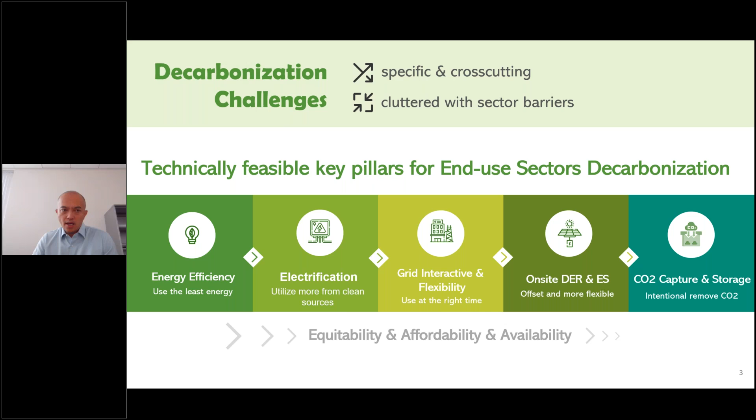For the last decade, our center focused on the energy efficiency pillar, addressing localized energy efficiency problems and working with plug loads. As we start the second decade of CalPlug, we're shifting our focus along with the emerging trends.

In terms of energy efficiency, there will be more and more smart and controllable plug loads emerging in homes and buildings. This will enable deeper energy saving and more sophisticated controls.

In terms of electrification, it is by far the most dynamic element of the energy transition. The share of electricity in global end-use energy will double from 19% to 38% within the next 30 years. There will be more and more new plug and process loads inside homes and buildings.

From the supply side, as the energy transition goes on, renewables are competing with all other power sources on the grid and also on the on-site generation side. Therefore, more dynamic grid resources and more locally dispatchable renewable resources will be available, and this has to be taken into consideration as well. So the trends of energy demand and supply are changing rapidly.

Therefore, decarbonization needs to be addressed not as an isolated system, but through holistic approaches.

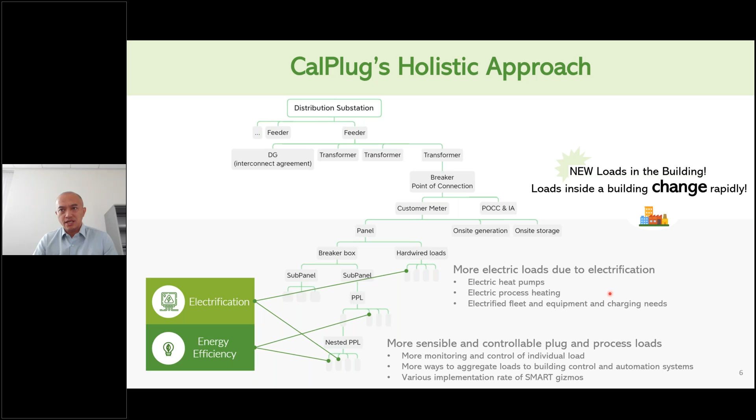On another layer, building control strategies that enable great flexibility in the interaction, enabled by directional on-site renewables, are taking effect at these points. But it needs to aggregate and coordinate as much of the loads inside the building as possible to be effective, starting at this connection point and down to the nested plug loads and process loads at the bottom.

So energy efficiency and electrification will introduce more smart, or not so smart, plug loads and process loads to the building, and existing building control strategies need to be adapted. They need to be able to better accommodate the rapid change of plug and process loads, to better utilize on-site PV generation and other energy storage, and to better accommodate grid interaction.

In summary, CalPlug's holistic approach starts from the very end use, the nested and rapidly changing plug and process loads, through the integration of sensing, measuring, optimization, analytics, and real-time control to provide data and insights. This enables optimal orchestration for grid-interactive efficient buildings, and also helps develop economically and technically feasible decarbonization pathways for small and medium-sized commercial buildings and small and medium-sized manufacturers and their buildings.

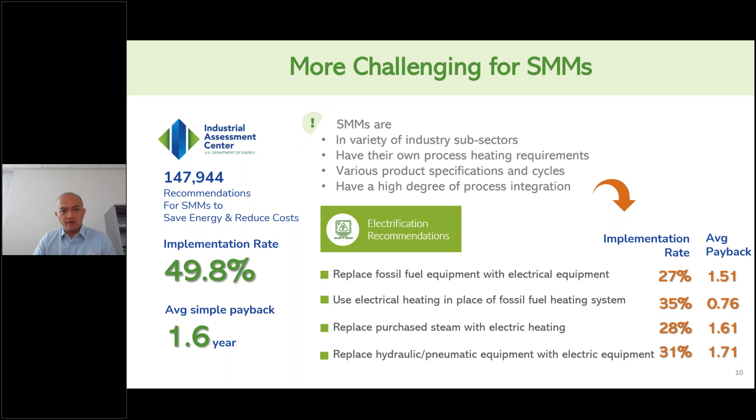From another perspective, our holistic approach is data-driven. It will use data and insights from plug and process flow to generate new business intelligence, new energy intelligence, and new carbon intelligence synergistically for small and medium manufacturers. The ultimate goal is to develop economically and technically feasible decarbonization solutions that improve energy and operational efficiencies for small and medium manufacturers and commercial buildings.

At the end, I want to emphasize that a holistic approach requires collaborative efforts. Plug and process flow, smart control, building automation, AI and their applications, distributed generation, energy storage, grid operation—these are all indispensable as we move forward.

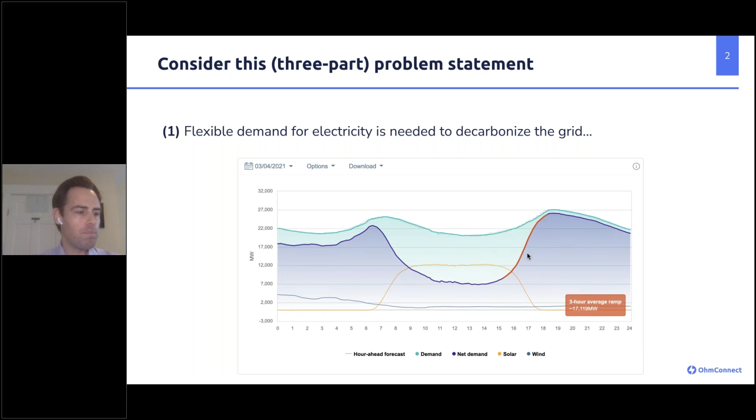And on this particular date in the spring of this year, we saw a 3-hour ramp of about 17,000 megawatts. So if we are going to continue to add renewables to our grid, we are going to have to find a way to move some of this load out of this particular time of day and into periods of abundant renewables. And we're going to have to do that through some combination of policy and technology.

The second part of the problem statement, though, is in order to get flexible demand at scale, we're going to have to do this through automation, through some significant automated control of household electric loads.

As you can probably imagine, it is completely unreasonable to think that 17,000 megawatts worth of loads are going to sit around on standby and wait to take manual behavioral only actions, turning on and off switches, on and off appliances or processes in order to help address that net load ramp. We're going to have to do this through automated controls in significant part.

The but here, part 3, though, is that many households face barriers to adopting energy automation technologies. And we're going to get into what these barriers are in a little bit more detail in just a moment.

But the solution that I want to propose to this group today is that simple Wi-Fi smart plugs are going to be able to help us overcome a number of these barriers and thereby catalyze the flexible demand electricity we're going to need to decarbonize our grid.

And in case you've never seen one of these little gizmos before, it's a simple inline plug. You can insert it into any outlet in your home. And in effect, whatever appliance you plug into this device becomes smart in the sense that you can control it, turn it on and off remotely over the internet using a smartphone, using your computer, or by setting a schedule.

And what we have found in our experience as a demand response provider in California is these little things go a long ways towards addressing the problem statement we just spelled out.

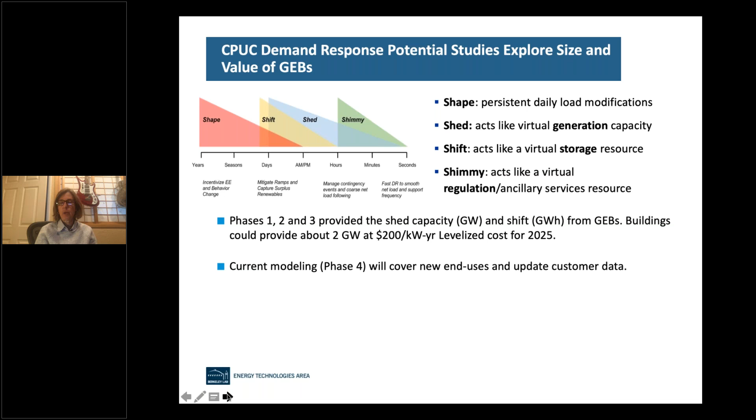So that's the main thing I wanted you to know, is we're doing more on modeling those plug loads, and it would be really great to work with this team of people to improve our modeling of those kinds of loads. So the basic idea is, how large is the shift and shed resource, and where is it?

When we do these models, we had 300,000 electric load shapes from California customers and 11 million demographic files. In phase 4, we now have 400,000 load shapes, and we're creating a variety of clusters that represent common loads for residential, small commercial, large commercial, and industrial. So we're trying to really understand the size and the location of the resource.

So finally, we know we need more of this shift, which John showed you the duck curve. I showed you something like that. So we want to drive down the cost to participate in providing flexible loads.

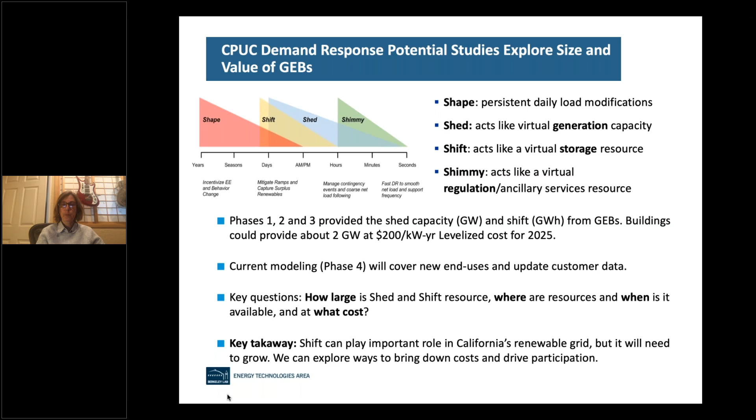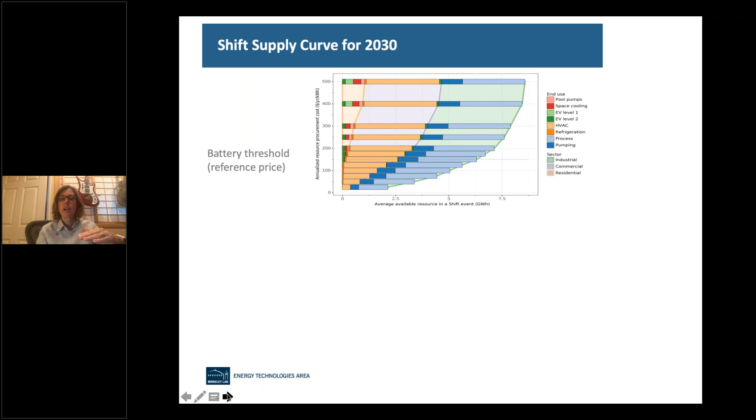This is what a supply curve looks like. I'm not going to go into the details, but we basically look at how many gigawatt hours are available for a particular price. And I have in there a dashed line, which is a battery reference. So anything cheaper than a battery is a real good investment in shift.

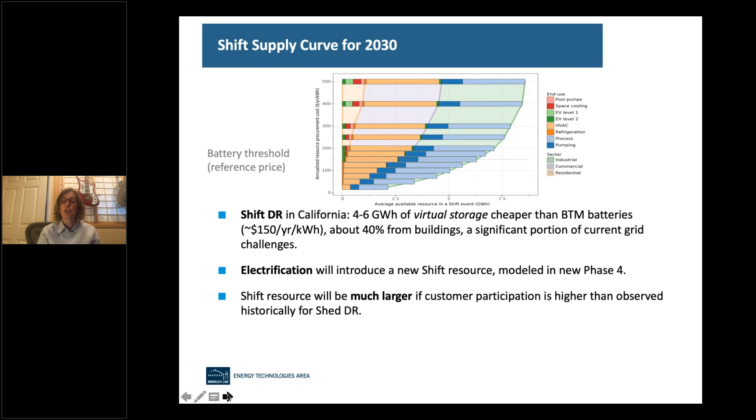So we have this 4 to 6 gigawatt hours of virtual storage. Electrification is super important because we're going to have, if we don't make heat pump water heaters and space heaters flexible, the duck curve gets worse. So we really need to look at how we make more flexible load out of it as we electrify, and the shift resource gets larger if we could have better participation, like the technologies that OhmConnect was providing.

So we really want to have about, right now we have about 1% of the load can get us about reducing 50% of that overgeneration from the duck curve that we have today. So these reports are available at drc.lbl.gov, the Demand Response Research Center, and I will of course provide these slides to you and happy to follow up.

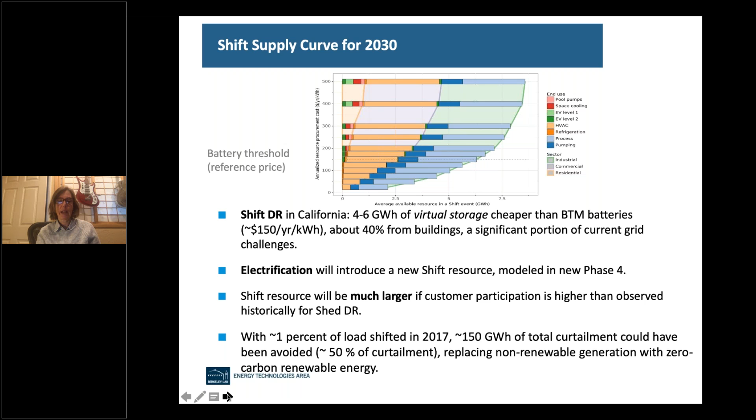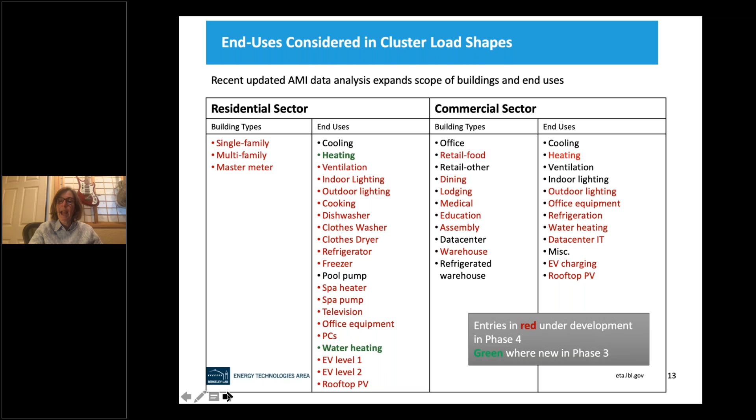So this is my final slide. Let me go back to this last one for a minute because I didn't explain the green. In phase 1 and 2, we modeled everything that was in black. Then in phase 3, we added the green. We added space heat and water heat in residential, but we didn't have electric space heat and water heat in commercial, which we're adding now. So in general, we're developing more capability to understand the end uses available for load flexibility by building type. In the commercial sector, we now have dining, lodging, medical, and education. We're adding more robustness to the platform and creating a capability that we hope to use to help the state develop policies and help utility programs understand how to incentivize load flexibility.

So I'm going to summarize for a few minutes and talk a little about, at a big picture, what we're trying to do in the CalFlex Hub. The number one thing we're trying to do is promote load flexibility based on price response, which allows for decarbonization of the buildings grid. We want to use end uses that can respond to price signals. Most of the utilities are hoping that we use OpenADR technology, which is celebrating its 20-year anniversary next year and is available for automating demand response today.

We are considering the price data models and how to broadcast prices. Most of OpenADR today is a two-way technology, so we're exploring broadcasting prices using the internet and a standard format, as well as FM signals. So then we need to understand what is needed to retrofit a device to enable it to listen to a price response. And where's the intelligence? Is it at the water heater? Is it at the cloud? Is it at the DERMS provider? The cloud may be a manufacturer or a DERMS provider. So we have a variety of these technologies, and we want to identify how to deepen the response.

If we had thermal energy storage in commercial buildings, in residential buildings, you could cool the building and store heating or cooling, and then use less electricity during the dirty hours or the expensive hours. Normally, the expensive hours are the dirtiest hours. So we could take that low price electricity and send an automated signal to devices, understanding how to use both a price signal and a carbon signal.

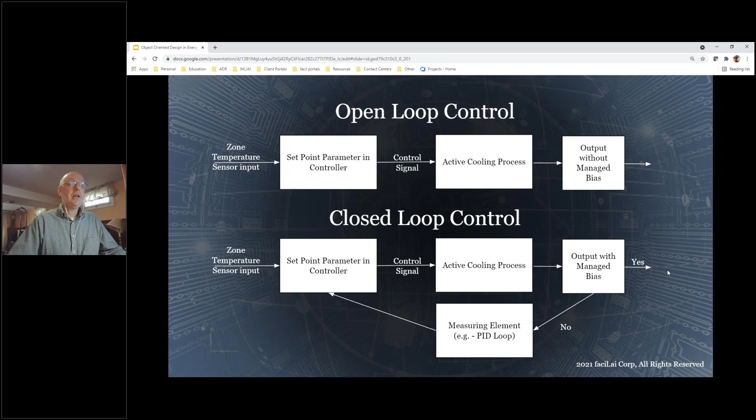In mission-critical and life-preserving applications, PID loops are the vehicle of choice to drive error towards zero. So you find PID loops in controllers in nuclear facilities, for instance.

But they are highly specialized. They require a very exacting degree of sensor calibration and take exceptional effort to tune. As a result, PID loops will not be in a negative feedback in those rare closed loop control systems that may be found in retail facilities. I've never found one in a retail facility, so I would suggest there isn't any.

It's highly rare. But please note there are three elements to error correction: there's the proportional, or the amplitude of the error; there's the integral, how it performs over time; and then there's the derivative, the slope of the curve. Those three elements are vital to any error correction.

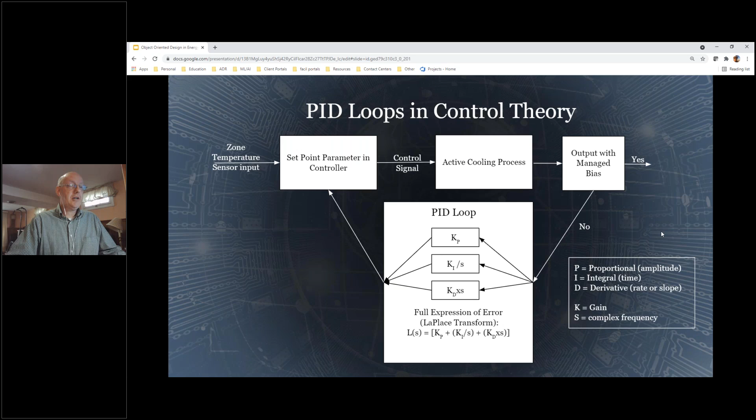This illustration shows how a PID loop would recurse with the negative feedback of a closed loop system in a highly engineered application to achieve the full expression of error. I hope you would note that the gains on each of the proportional, integral, and derivative elements are returned to the loop as a control input. But you can imagine handling each of those three elements would take a rather extraordinary effort.

Just want to point out that you may recognize this from high school math, that the limit of a function as it approaches zero is zero. That's what a PID loop is trying to achieve.

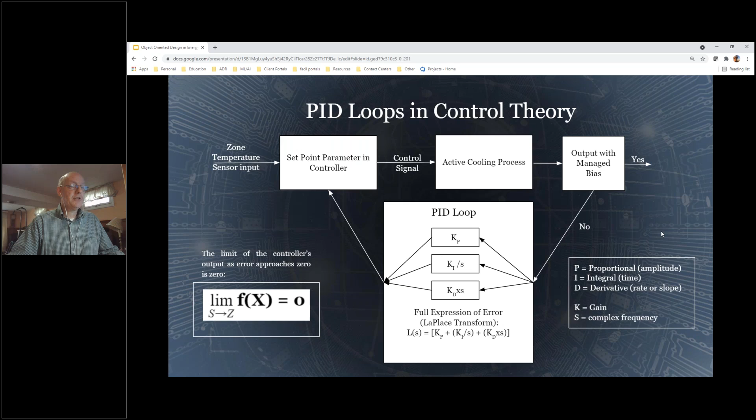And I did indicate in the slide with the contents the subjects we'd be touching upon. There are cases where there are closed loop systems out there, but in a way, to penetrate a market, they only attack the amplitude of the error, which is instantaneous. It doesn't rate its slope. It doesn't rate its performance over time.

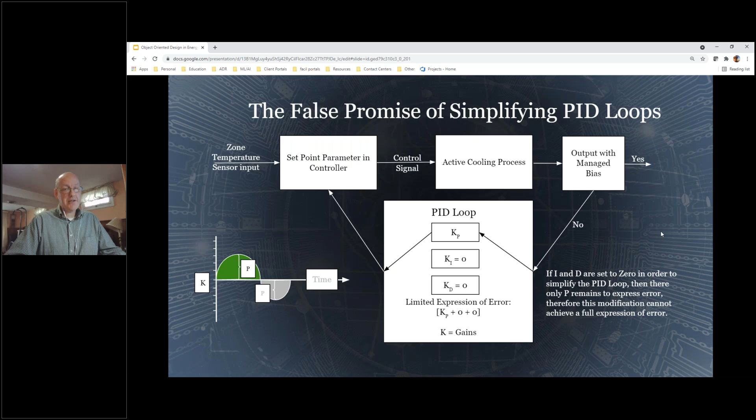So there is a false promise associated with that. If we find an environment with less rigorous engineering where this could be employed, we can safely assume that one of the elements is only being included in the error correction. But the input that it returns would be an imprecise error solution and would not substantially close the performance gap with closed loop control.

So in terms of virtual closed loop control, you recognize the top element looks like open loop control, but what we're looking to do is that through a machine learning mechanism, we can provide the bias back to the open loop controller, thereby virtualizing the closed loop, a true recursive loop. The immediate effect is that it restores the proper role of set point as an output as opposed to an input, which is

a commonly held belief by those who work with open loop systems. And by doing so, the machine learning will provide the tuning mechanism to achieve accuracy in your output.

So by positioning the algorithm at the local advanced supervisory control hardware, we obviate latency as an inhibiting factor. And the connection to object-oriented design, which is our larger theme today, is in its essence that this loop is nothing more than a type of automated decision that we just map out in advance.

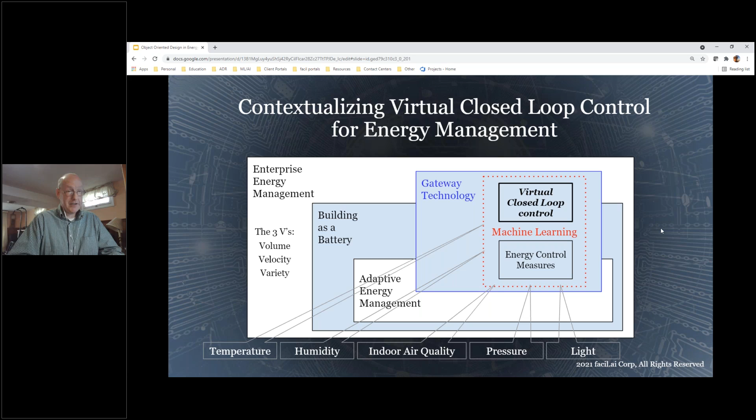And now we'll move into object-oriented design, and I hope this doesn't seem far afield in terms of energy. I think I will effectively make the connection here, but object-oriented design is, I think it's safe to say, underappreciated, perhaps undervalued outside of the software industry, but it deserves to be recognized as a fundamental exoskeletal structure of energy management. So for purposes of today's presentation, I'm going to be less focused on the four pillars, which is

really driven by the software industry, and I want to direct your attention to object and class of object. These two elements play a critical role where energy management intersects with data.

And so with that, knowing the object and class of objects, we must absolutely know the nature of the source devices that the data are describing to us. Our gateway technology is the fulcrum to our categorical understanding of devices in the field.

You may have heard the term edge devices. That's ultimately what we're looking for. And our knowledge of their performance is informed by those data. So this knowledge makes distinct the type of device we're dealing with and informs us of its expected order of operation and therefore directs our downrange decision making.

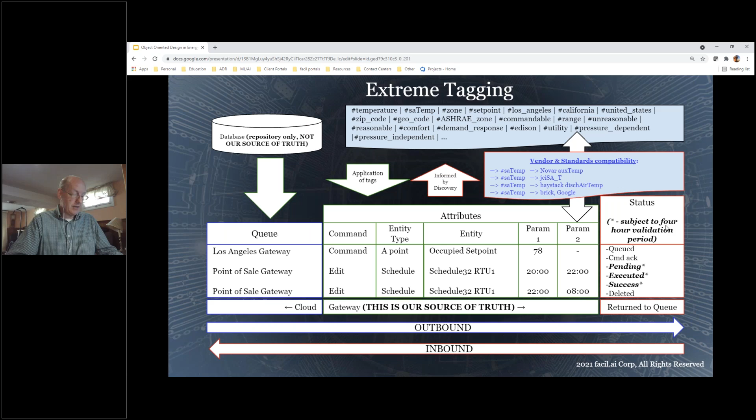But undergirding that is the practice of object-oriented design, because it conveys to us not just the object, but the class of object. Decision Model and Notation is the recognized standard for mapping decisions. Documents, knowledge sources, and decisions within the context of object-oriented design are classes of objects. So I think it's fair to say that decision management is a specific use case of object-oriented design.

More broadly, object-oriented design is a powerfully strategic management paradigm. And if one could objectify features or tasks within the program of decision management, then it would simply be a matter of calling upon these objects and sequencing orders of operation to meet the objectives and decisions within an energy management program.

Decision management and energy management are two sides of the same coin, and they are inseparable. At times, that can be difficult to convey to people who practice energy management. They don't often recognize that they're making decisions on energy, and the two really need to be viewed in the same context.

So we'll spend a moment here on speed to decision. There's a phrase in professional analytics circles that indicates the tub must drain at the same rate that it fills. The idea is you don't want your analytic work product just piling up and going nowhere. It needs to have a purpose and an endpoint.

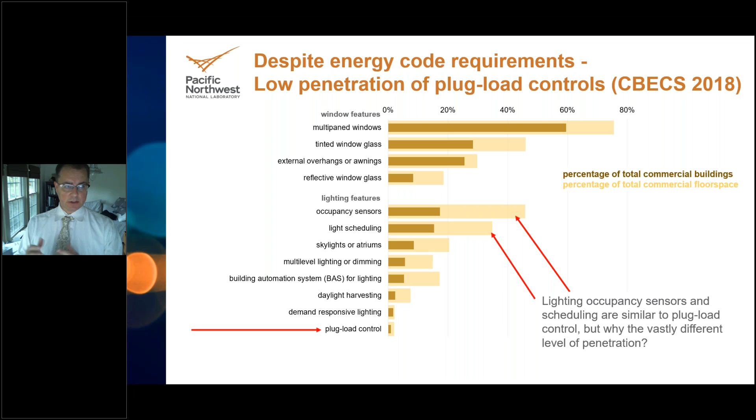Now, some of that could be code, but there's a lot of user feedback and user experience that I'm going to highlight in this presentation explaining why we see such a difference in penetration.

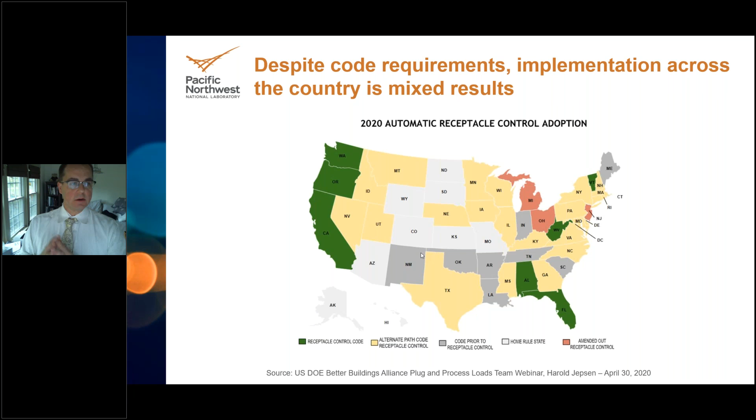My first question is: is that sufficient enough to not let people use controls? I'm a little on the fence. I think they need to be more stringent, since we know that controlled receptacles are really important, which is kind of why we're all here today. But we're seeing codes not truly value the energy usage and energy savings from the controlled receptacles.

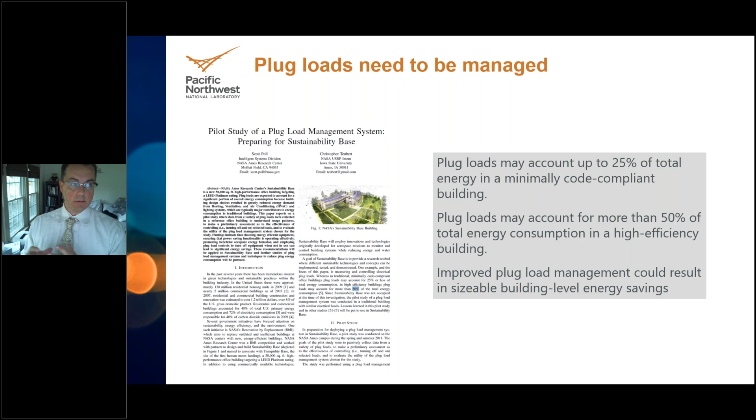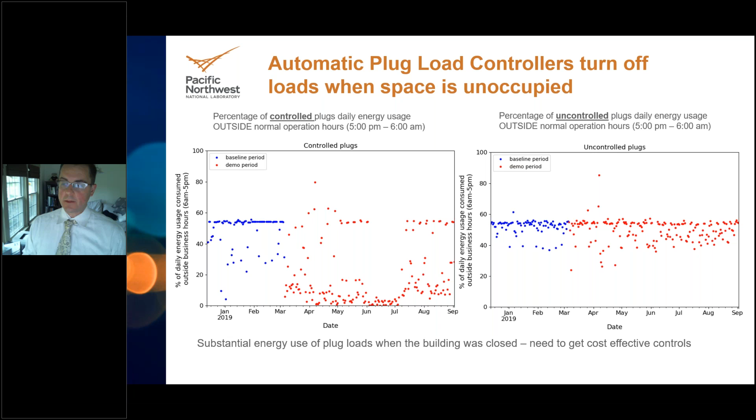Highlights why you really do need an on-site champion. This is not just a technological solution. Humans play a critical role if we're going to go after this technology. We need people to remind them, saying, hey, you got to think about that new device you plugged in. Could it go in the controlled receptacle? Periodic checks. That zero energy project I did, I think about every month or every 3 months, they do an actual evaluation just to make sure that that load is trending the way they need it to maintain their zero energy status. So we need to figure out a way that humans can be a champion without being a burden or badgering people about their controlled receptacles.

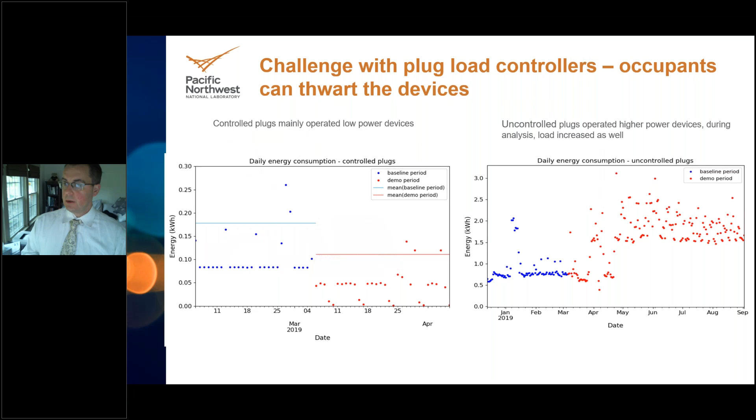The other challenge we have with controlled receptacles is the installation. So in this case, this is an Air Force base. They went with wireless receptacle controls. So the idea here is you have an occupancy sensor in the light fixture, and it's communicating to the receptacle in the wall. They did about 15 receptacles, and about $160 of that was just the cost of material. But this required 2 different firmware updates, delayed the whole schedule by about 3 months, and added almost $550 in labor.

And that's going to be a challenge that we're going to have to think about if we are going to adopt controlled receptacles. You can do this without doing a wireless, but as we get smarter technology, and I think the earlier presentation by John mentioning, kind of shipping these things ready to home devices, it's easier to manage firmware, it feels, at the home level versus at the commercial level. Your IT security tends to be tighter and stronger at the commercial level, who can actually do certain things. So firmware updates is actually a big thing that we need to think about, how they're going to happen, who's going to do them, how we're going to push a node or push a download to those devices. And they may be sporadic, we may not know exactly when it's going to happen, but that is a challenge.

While this is the wireless receptacle, at one of the other projects I had, they meant only half the receptacles in the office to be controlled receptacles, but the electrician wired it slightly incorrectly. And so because of the way the room was wired, every receptacle that was downstream of the controlled receptacle became a controlled receptacle in the room. So you can still have human and installation errors regardless of whether it's wired or wireless. But again, I think this is something that, while it sounds simple, just a simple on-off controlled receptacle, it's definitely something we need to manage of how they're being installed, and that firmware, especially for anything smart, is a bigger issue as time goes on.

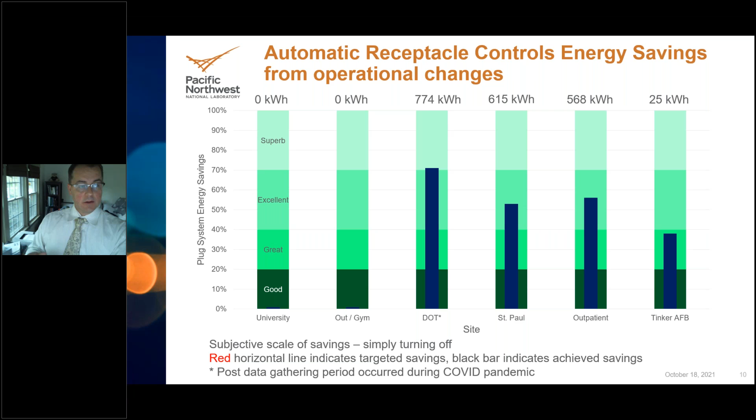This is over a number of receptacles. For instance, that DOT facility, I believe 7 or 8 receptacles just to save 774 kilowatt hours on an annual basis. The Tinker Air Force Base is 14 receptacles for 25 kilowatt hours. So the challenge is that while the percentage may be high, the actual kWh is low. And that's something that's hard to deal with. Why is that hard to deal with? Costs. Costs seem to make no sense.

One of the other challenges, as I just mentioned on the previous slide, is that while a number of these receptacles can save a high percentage of energy, they may not save that kWh, which makes monetizing this and making a cost-effective payback really hard. Many of these projects had over 100-year simple payback.

I really like the idea that John suggested of a receptacle that's shipped directly from the manufacturer and can be really brought online. That works well at the residential level, and we know how it works there. But at the commercial level, you're dealing with electricians, commercial grade equipment, and commercial IT networks, which makes things more complicated. That's some of the challenges we're having in recouping these costs, and that's again something we have to deal with.

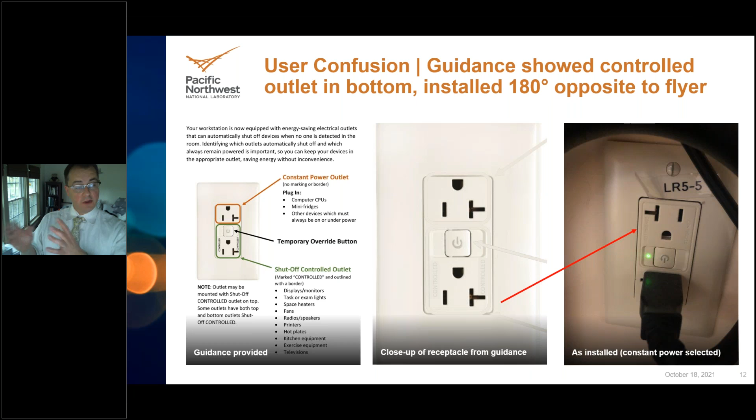The image on the right is how the receptacle was installed on site. Notice the arrow I show. What happened was they installed it 180 degrees off, and you can tell by the ground pin. So now we were left wondering: did the user follow the instructions, or did they choose to opt out and not use the controlled receptacle, thwarting the system? So again, how we're marking these and the user confusion is definitely a challenge we're going to have to manage with this technology.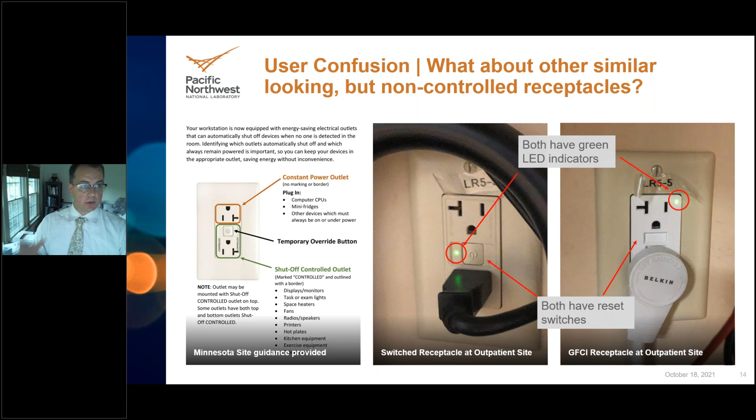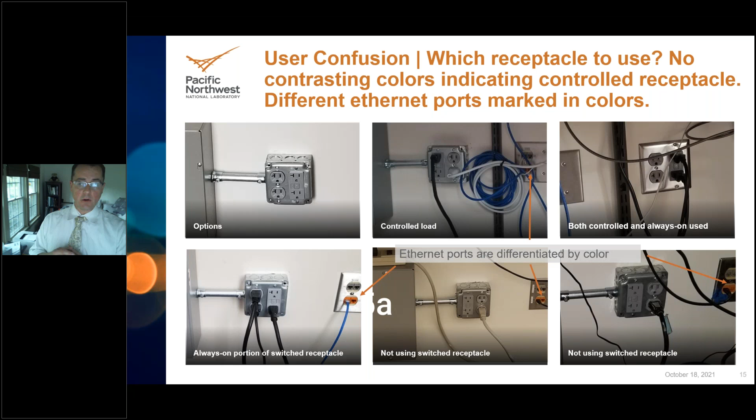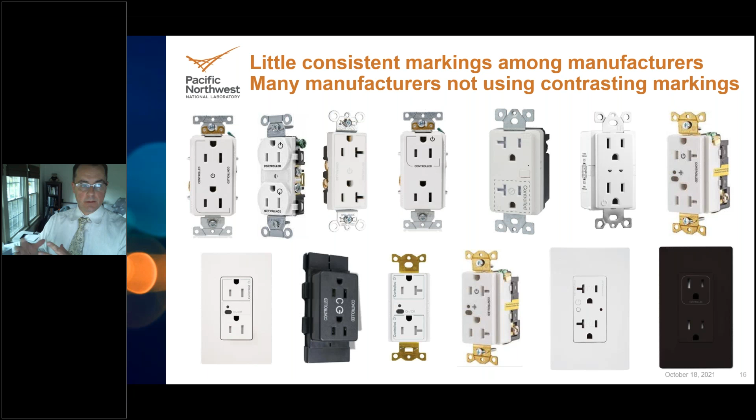So, summary: code adoption is out there for controlled receptacles, but we have limited success. Some of that is just code adoption cycles, but some are outright cutting it out, and that has to be addressed. The alternate options for controlled receptacles may not be sufficient enough considering how much the controlled receptacles are as a building load. We need to put more teeth into this and make it a harder lift if someone's going to opt out of this technology if we want to be successful.

As I said, I'm a lighting practitioner by trade. Now we're starting to see plug loads becoming much greater than even lighting loads, so this is the load to start really focusing on, and that's why it needs to be more important. Humans are always the problem—they can thwart it after you've installed it. We definitely need some type of on-site champion. That's how we need to think about this technology rather than just installing it and leaving it.

Savings are mixed—we can see some high percentages but low kWh, and that directly makes cost recovery very hard. I don't understand why there's such a wide variety in costs for materials, and that's something I'm seeing in other technologies as well, which needs to be solved. Installation error and confusion error have to be thought through to make these simpler and easier to use devices. Finally, we need better methods of communicating to occupants, and ultimately standardized and better markings on the receptacles themselves.

This is just something I've seen over the last 3 to 4 years across 8 to 10 different projects. Here's my contact information—I look forward to any of your questions or feedback.

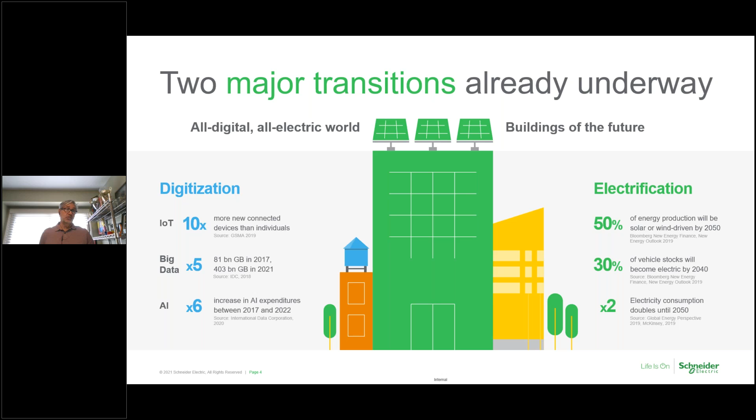So what do we think is important? I consider myself an evangelist for smart building technology and the implementation of this technology. But what's important as we look towards the future? We want to be sustainable.

So we want to think about using the appropriate energy asset. We want to be resilient so that we can recover quickly in the instance of a weather event. We want to be efficient. We want to make sure that we're not heating, cooling, and lighting when people aren't in the space. And then finally, we want to have the capability to have this technology be people-centric.

The previous presenter was talking about the outlets and the confusion as to whether the top circuit or the bottom circuit is the one that's controlled. We really feel that as technology rolls out, it's going to be an issue of guidelines and standards, setting up and adopting technology that is easy for the consumer to use, so it becomes natural. You really don't have to think about things to make sure you're doing things sustainably or greenly.

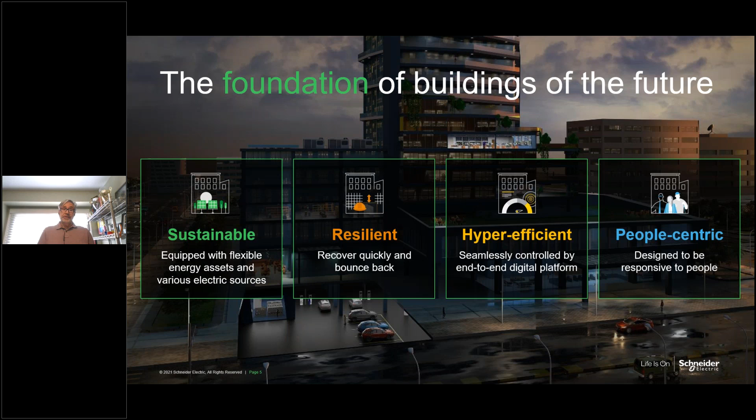So just to restate some of the points I made a couple seconds ago, 30% of the world's energy goes into buildings. We generate 40% of the greenhouse emissions, and as we sit today, we rely a lot on non-renewable energy resources. That's going to be changing. We feel it's going to be important to reduce carbon emissions as quickly as possible. Here we say by 2040, but the truth is, the faster we can do it, the better. We want to move towards green renewable energy, and we want to decarbonize other industries.

Now, as we look at our building stock today, and as we look at resiliency, we're only as good as our weakest link. And the previous presenter, Michael from Northwest Labs, was saying folks don't know what outlet is controlled. Well, that's a potential weak link. So what can we do as we get involved in professional organizations and generation of standards to ensure that this technology is transparent and understandable?

Now, a truth of connected devices, smart plugs: there was a fact brought up in the prior presentation talking about the cost of updating firmware because someone had to walk up to an individual plug and update that firmware. Gosh, I saw the number $550. Well, the truth is today, we've got the capability with smart devices to do these operations remotely. That's not across the board with every device, but that's where things need to be.

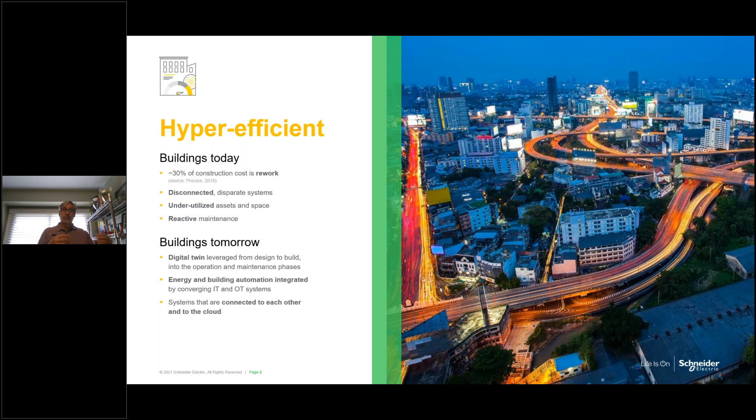Folks talk about digital twin technologies, and what's on the horizon from the building automation system and smart building manufacturers are digital twin technology. So we can model facilities prior to their actually being built and think through what are the potential stopping points, where am I building this the best way that I can, so I can ensure that when I deploy the system, it's going to deploy the way I designed it.

In terms of people centricity, how are systems being designed so that folks have the capability to see what's happening in our space? I use this a lot with folks I talk to. Back in 2007, when the iPhone was first deployed, a good chunk of us probably said, boy, I'm never going to pay $500 for a piece of glass that I throw in my pocket that I'm going to lose or break. And as we fast forward to 2021, the truth is we're not paying $500 for this device, we're paying more, but it's an indispensable part of our life. So our use of technology and our dependence on being able to use our smart device to see what's happening with the environment we live in, we feel is key.

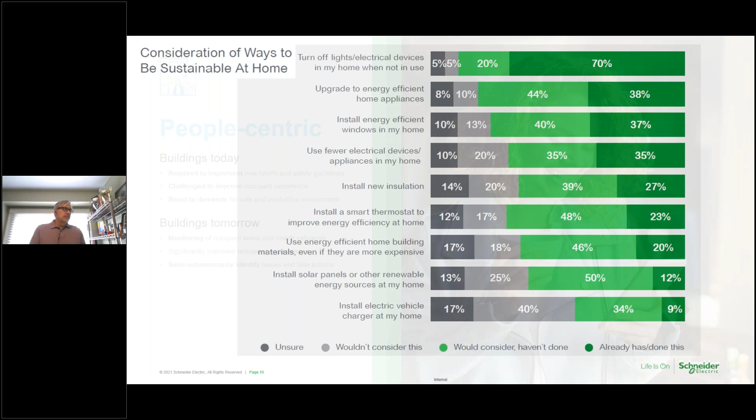So how can we be sustainable in our home environment? As we look at how systems are deployed in buildings, we've gone out and surveyed the marketplace. People are highly interested: can I turn off lights and devices when they're not being used? The truth is a lot of people have already deployed this technology, and 90% realize they want the ability to control the lights and their controllable things.

As we go through other considerations, can we use fewer electrical devices, like smart thermostats? Looking at the marketplace, it seems that for the most part people are fairly accepting of deploying technology into their environment. They just want a simple path to get there.

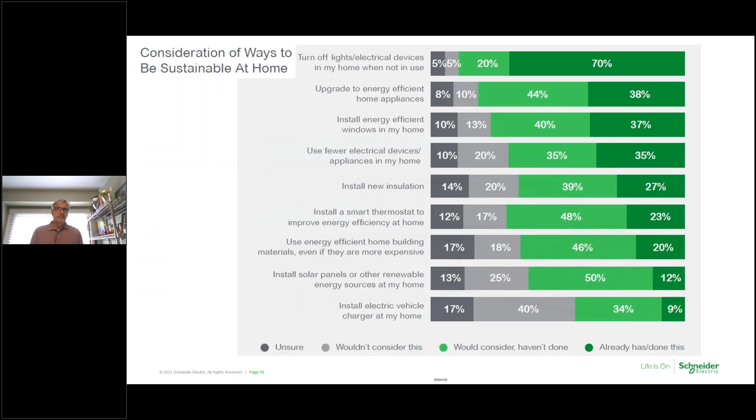Now I'm just going to use the example of a connected home. What are some of the things that could be part of the new smart connected home? Certainly integrating solar and EV charging. As utilities change their rate structures and how things are deployed, we envision a world where giving a home the capability to island off of the grid may reduce the impact on our power plants. Maybe we can use battery power from our electrical vehicle, feed it through our breaker panel, and power the home if there's an event on the grid.

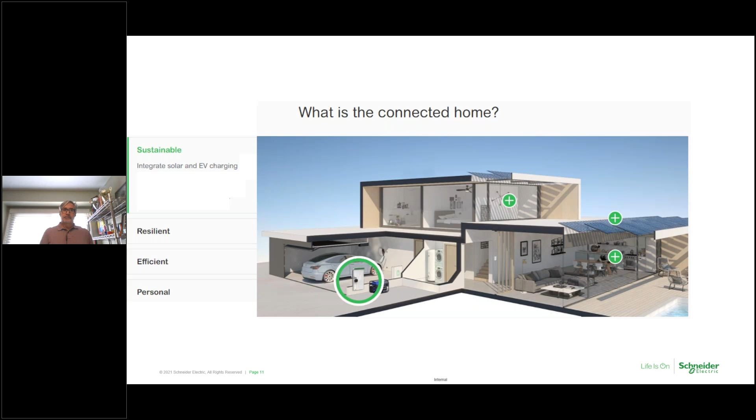What else do we want to do? Certainly solar. Solar has had a high rate of uptake here in the California market. It's becoming almost a de facto standard on any new construction. But how best can we use this solar power?

How do we monitor what's happening? We think it's really important that if you've got smart devices in your home, you're monitoring how you're doing, and there's no one size fits all. Companies like OhmConnect—personally I was an early adopter because it really lets me know how I'm doing. It effectively gamifies the whole experience, so I'm incentivized to know that there's an energy event happening and I'm participating, allowing someone to control my thermostat to ensure I don't turn lights on when there's a utility event happening.

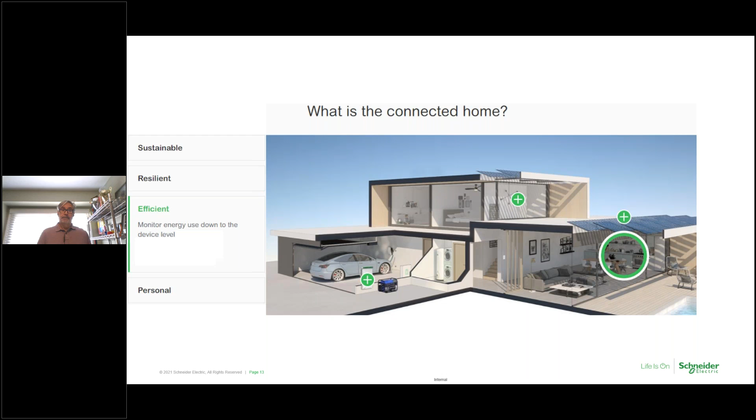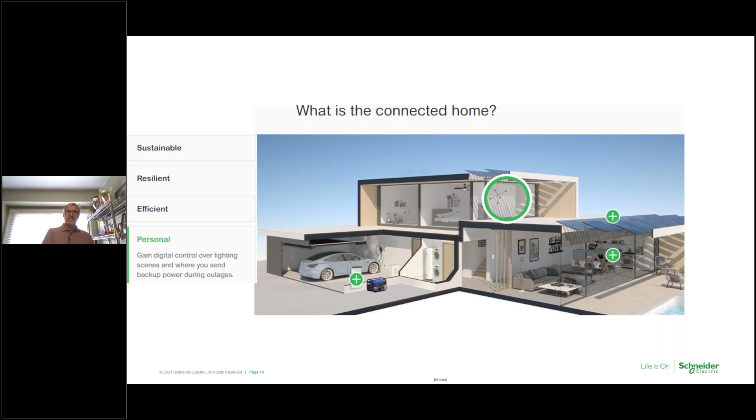And again, what are we doing on the personal side? Are we giving apps to someone's smart device so they've got the capability to see what's happening, make changes, make control?

So as we look towards our path to the future, everyone talks about net zero. We feel that consumers have a pretty fair understanding of the need to move towards net zero. From a cost savings standpoint, they want to save on their energy bill, and most folks have a positive attitude towards moving towards a carbon neutral future.

Why are people interested in smart technology? They want to reduce energy consumption, lower energy cost, and have feedback as to safety and security in their space. If you give someone an app so they can see what's happening with their home, they've got the capability to know from afar that their lights are off and their doors are locked.

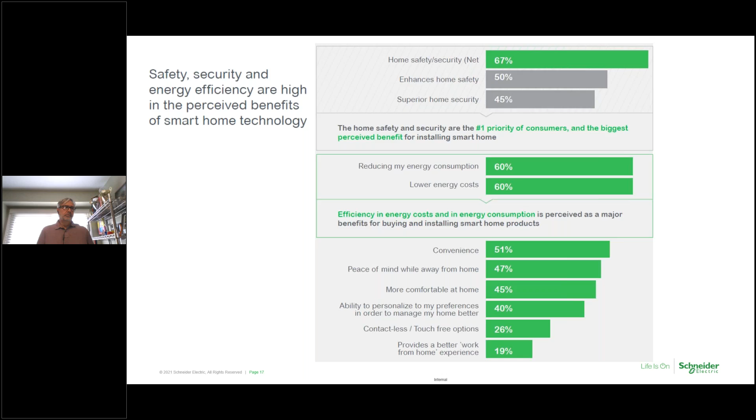So some of the quick ways folks can make their home environment more sustainable is to look at what's going on in your space, in your facility. Do you have smart devices? Do you have smart outlets? We feel that consumers are very accepting of this technology, and the number of smart devices, as most of us on this call are aware, is ever increasing.

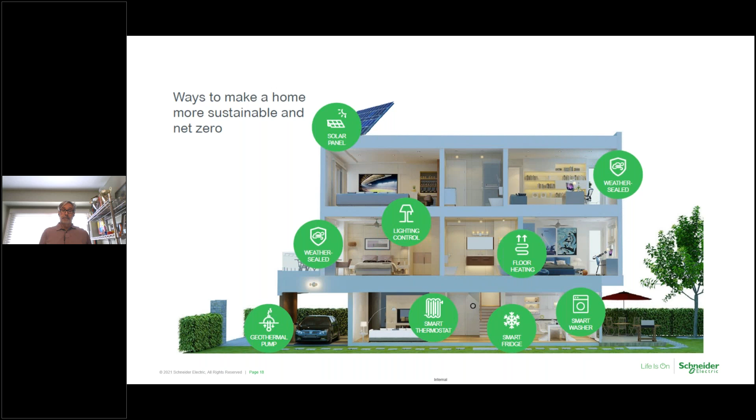Again, what can we do in terms of connected home solutions? Certainly we feel that we want to give folks the capability to monitor what's happening in terms of electrical consumption, have that easily be available to your smart device. We feel consumers are going to want to have some insight into what's happening in terms of savings.

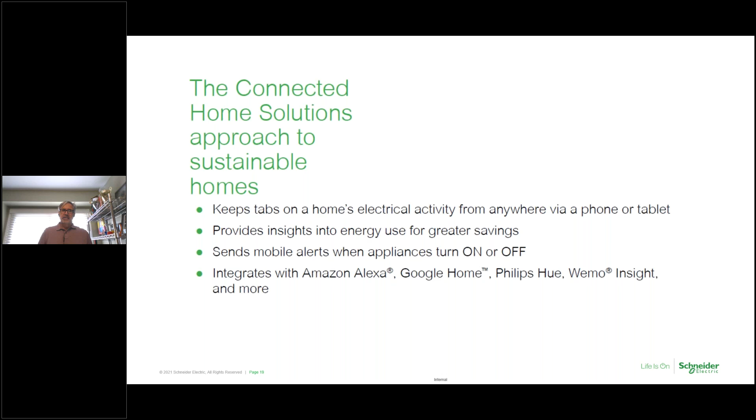A lot of folks certainly would like an alert that something's on or off. Does it integrate with commonly available devices? Because we're a big believer that coming out with a device that is manufacturer specific, although it may work great, if it doesn't integrate with other people's things, some of the performance is going to be left out of what you can do in that application.

So again, in closing, what we feel is very important is to enable buildings of the future. I'm going to harp back to the 4 points I made earlier. We feel that as we look towards working in new facilities and existing facilities, sustainability is key, resilience is key, efficiency is key, and people centricity is key. And those are by no means mutually exclusive. Those are additive, and we feel that's very important.

And on that note, I see it's about 11:25. So GP, I want to thank you, and I'm open to any kind of questions.

Thank you, Kirk, for an outstanding presentation. So I have a question here. In what way can building automation systems increase integration and interoperability with other building loads, such as plug-in devices, a plug load control system, or the process load, and so on? Because like what you say, the integration is key, and also there are so many different systems out in the market. So sure, there is a need for standards, but from your viewpoint, how do we really enhance that integration effort?

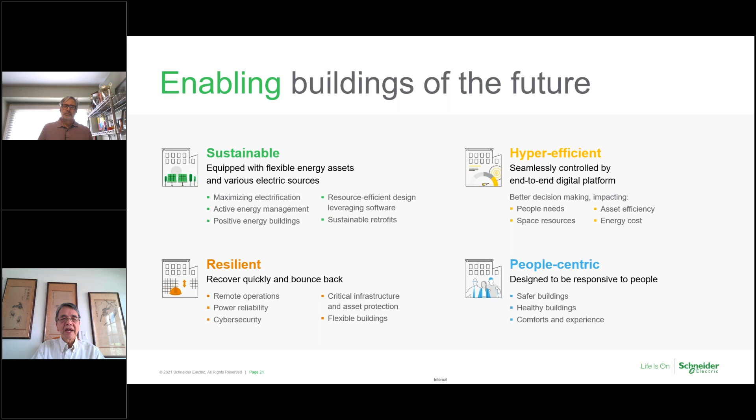Do we have everyone? Paul and John, okay. So welcome back to the panel discussion.

In the next half an hour we'll have a joint discussion and promote collaboration among all the solution providers and champions in the field.

Let's start with a generic question. Since we're dealing with plug load and process load at UC Irvine, a question of great interest is how we can form a strong partnership with all of you. So the first question is: what do you see as the biggest challenges in integrating plug and process load devices into building level energy management and flexible load systems, and what do you see as the most promising way to address those challenges? Who would like to take a first cut?